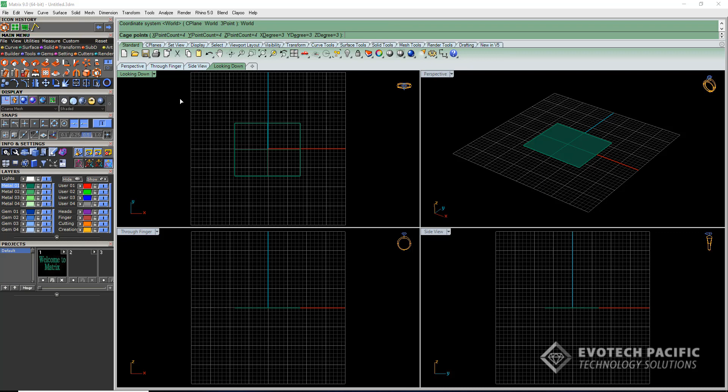And I'm going to grab one set of points and just drag them down, and we'll grab these guys here and bring them up, just so that we've got a surface that looks something like that.

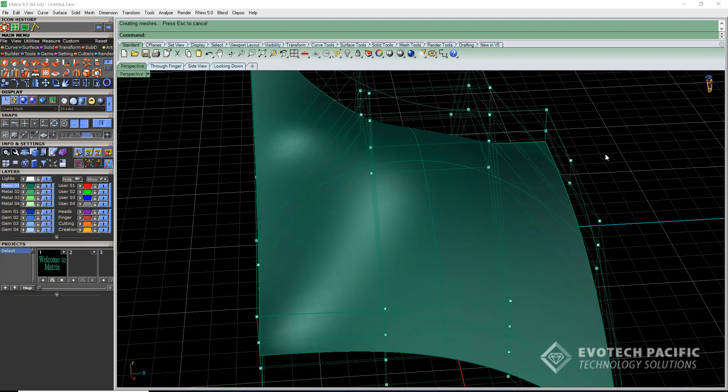To get rid of that, we hit escape and then select our control cage and we have something like that. Now if you're wanting to pave a surface something like this...

I'm going to switch to my red layer color, and the very first thing I want to do is go to the curve menu and select extract isocurve. Now I'm going to select my surface for isocurve extraction and just snap to, say, the midpoint there.

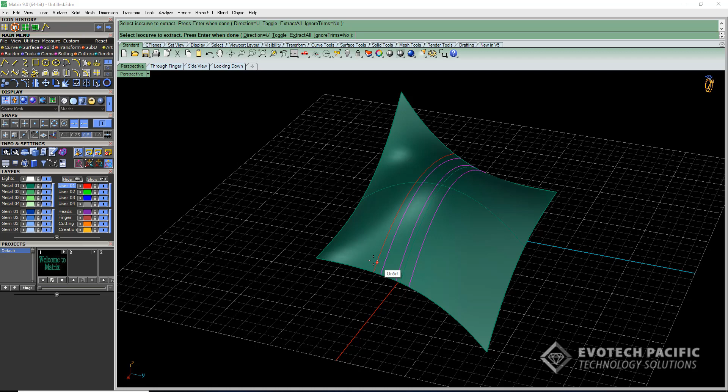And then I'm just going to create a few more layers of curves. They don't have to be even, anything just like that will do fine.

One of those curves, that original curve, I'm going to put onto the green layer color, and this is going to be our master curve, and all the others will be our slave curves.

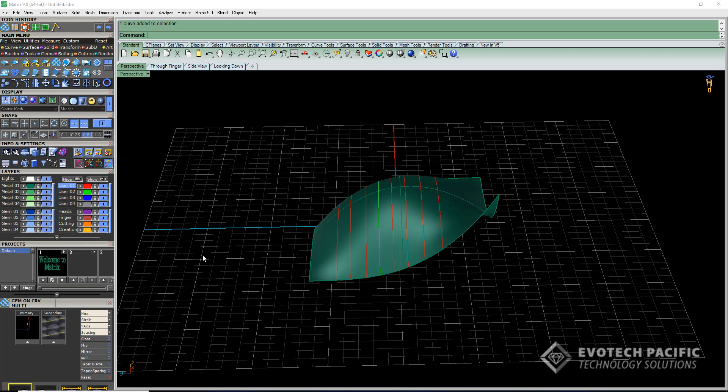So I'm going to go into my gems menu and select a tool called Gem on Curve Multi. When we do that, we're going to grab that primary or master curve and put that into the window here, and then all of the other curves, the red ones, we'll select all of them at once and pop those into the secondary window here.

We can change that quite easily by coming across to the left hand side, and where it says y-axis, click on that and just click on down, or you can click on surface. I'm going to select surface.

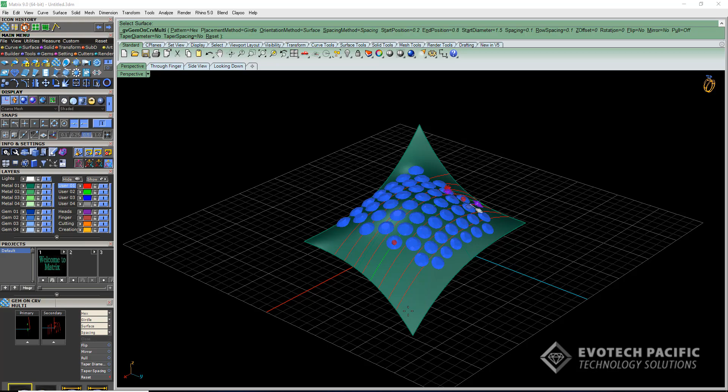When we select the surface option, the command line will ask us to select our surface, which is our green surface here, and now all the culettes will be pointing in the correct direction.

From here, we can simply grab our start position and take that to where we want it to go. We can take our end position down as well.

You can taper the gemstones if you wish by using any of these commands here. So if we want to taper the diameter of the gemstones, for example, we can switch that on.

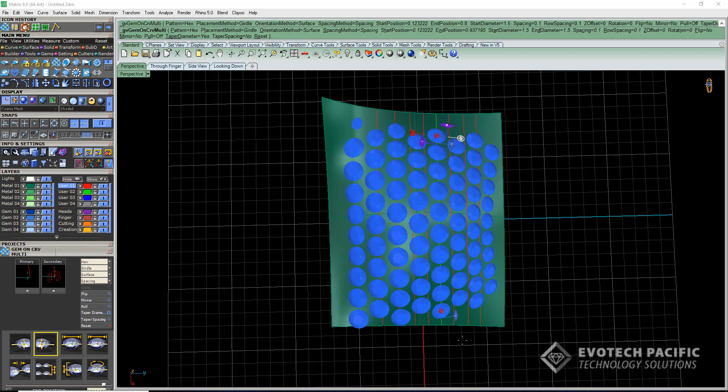And now we have a handle at the top for the start diameter and one down the bottom as well. So we can increase or decrease as we see fit.

So we want to go to, say, something like that, about 0.9 of a mil. And we can increase this size here or decrease, whatever we feel like we need to do.

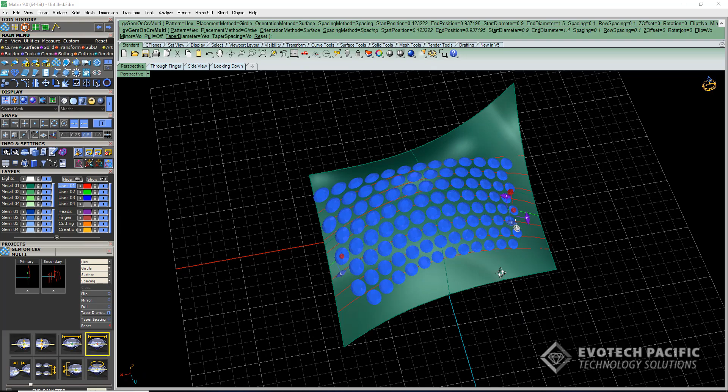Alright, once we've got that there, we can also turn the taper spacing on as well. That'll give us another option here for the row spacing. We can bring those in and tighten them up a lot more.

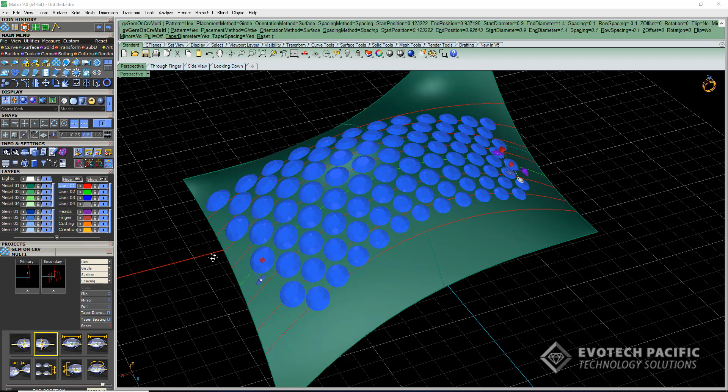We can do the same thing on the other side too. No, we can't. That's right, because we've got one of the hex options on.

So we've got different patterns up the top here as well. So we can go to square, we can go to square pinched, and that just brings the stones in a lot closer. Arrow, which gives you an arrow either end.

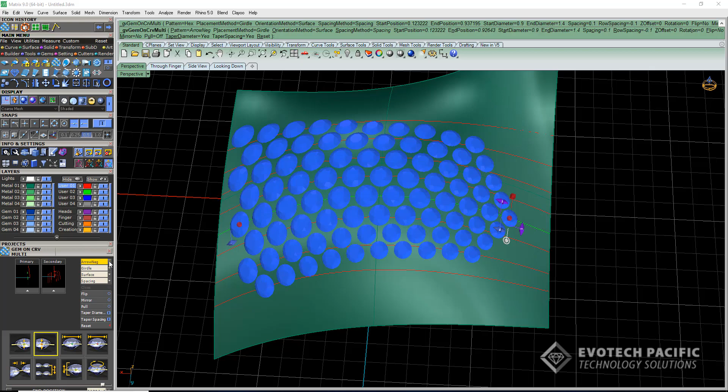You've got arrow positive, and then also arrow negative as well. So it really depends on the design that you select. I'm just going to stick with hex though.

And once I'm happy with where those stones are sitting, then I can simply hit enter. From there, I'm going to select my first row, my master row, hit F6, and go down to prongs.

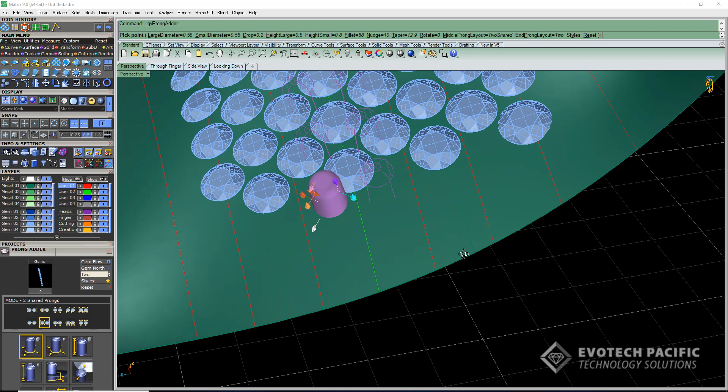Now here's where you need to adjust your prong sizes accordingly. So I'm going to take that large prong diameter down, say about 0.4, just holding down shift to engage increments of 0.1 of a mil.

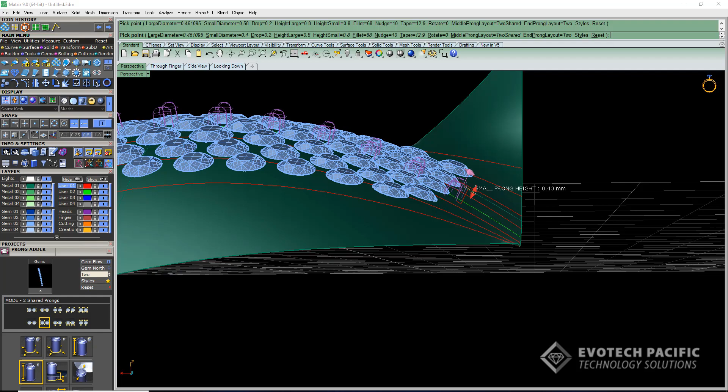Take that height down a little bit more, say about 0.5 if you're setting. If it's for renders, take it down to say 0.3 or 0.2. Let's leave that at 0.5 for the moment, and we'll have a look at the larger section here, because obviously those claws will need to be a little bit bigger since the stones are a bit bigger.

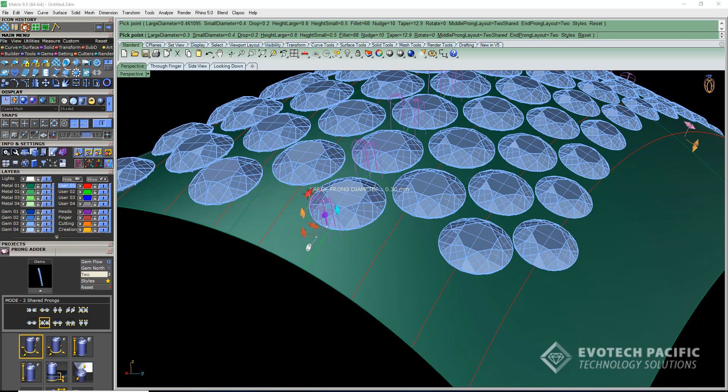And we have all of the options here that we need to play with. I'm going to take that to, so, about 0.5 of a mil, that should be fine.

You can increase or decrease your nudge as well, all the same usual prong options that you have. And of course we can take that down to say 0.8 to about 0.5 as well, and then hit enter.

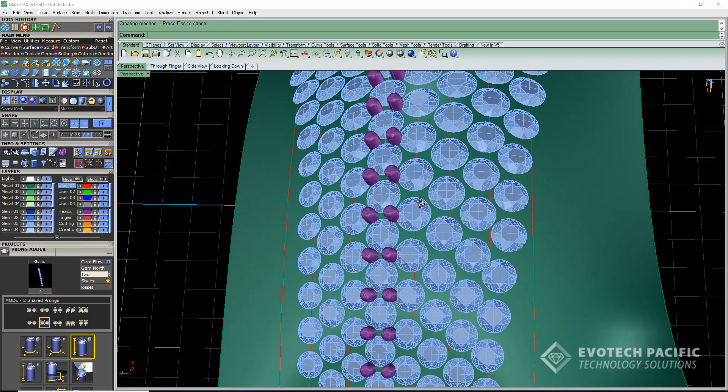Once we've set that first row of prongs, then all we need to do is select the next row, hit F6, and match attributes to that stone there, prongs, and create, and keep moving along. So F6, match attributes, this one here, prongs, and create, and just keep on moving through.

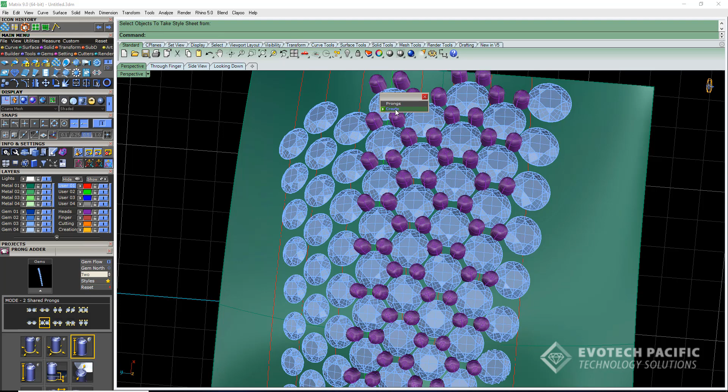And you have something like that. I hope that helps.